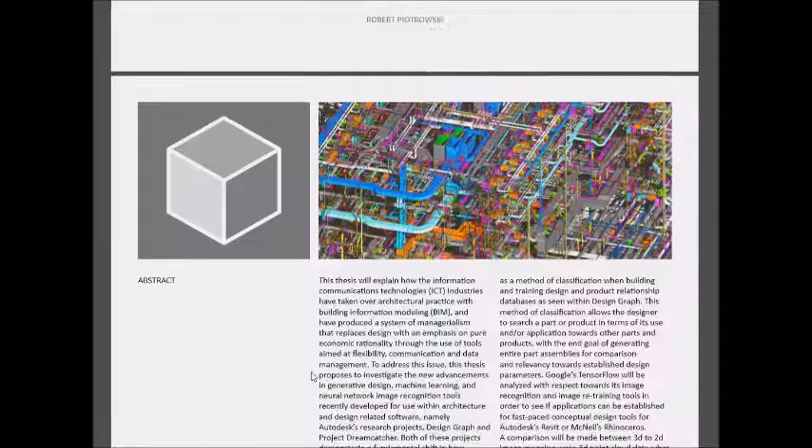So, this will be really hard to get under 15 minutes, but we'll try anyways.

This thesis will examine how information communications technologies, particularly in the ICT industries, have overtaken architectural practice and building information modeling. This has produced a system of managerialism, which replaces design and the traditional methods with an emphasis on pure economic rationality, used through tools aimed at increasing flexibility, communications, and data management.

To address this issue, I will be investigating generative design, machine learning, neural networks, and image recognition tools, and try to apply them within Autodesk's software packages that architects typically use in the industry.

Autodesk has released two experimental platforms, DesignGraph and Project Dreamcatcher, which are machine learning applications to design challenges dealing with 3D geometry. I think this is extremely interesting and maybe a different approach. So I'm going to examine two different ways to go about this.

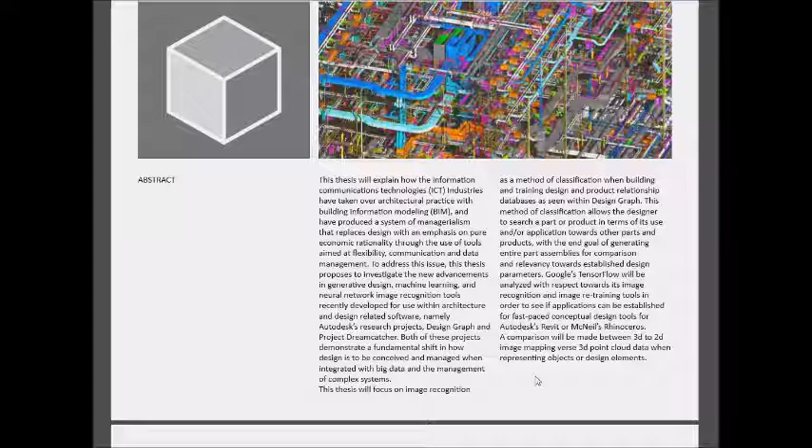Right now, architecture and engineering are undergoing rapid changes. The profession is completely changing in its recent adoption of these building information modeling platforms. Firms of all sizes are trying to get into this, as it's becoming the only way now to do business within the profession.

Clients increasingly call for it, and in some countries, in the European Union, it's even mandated for use on certain types of projects. So there's a very strong push towards this kind of platform on how buildings are to be done.

And this is a very different approach from what has previously been done in, say, a CAD-based platform, where you design and draw out your whole entire building. CAD could be, it's more open-ended. It could be called, say, a design platform.

But building information modeling is strictly classified as an information communications technology product rather than a design tool, as the main focus of it is coordination with other fields and industries. Its goal is to streamline processes of managing and comprehending all the data associated with an entire built environment project. This is done primarily through 3D digital representation of every component in that project.

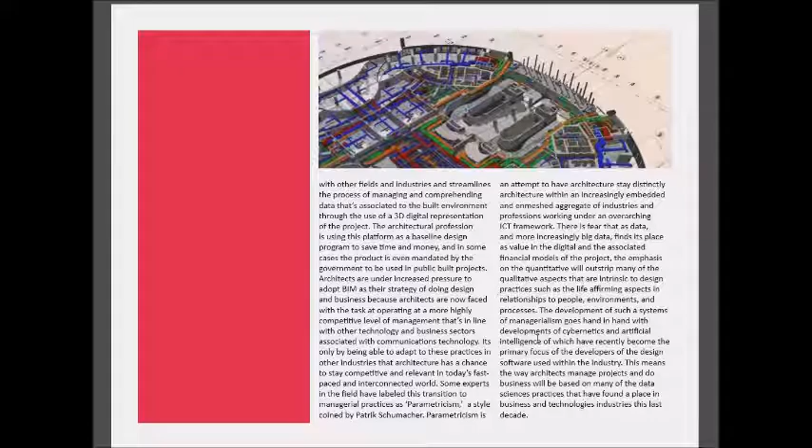Autodesk, which is the primary software company in the US that does industry standard software tools for architecture, movies, industrial design, and civil engineering, has a stranglehold on all these industries, but they're developing these tools. More often, they're focusing their efforts on machine learning applications in their research department, and they're slowly implementing these into their more commercial packages. One of these is Design Graph.

Design Graph is a different way of managing large complex data sets, and it uses machine learning to create a database of parts and relationships. This is more used towards engineering, mechanical engineering, industrial design, or applications that use a lot of standardized components that can easily be recognized.

They kind of came at this with: what if there was a better way to organize all information, so then it allows the designers to create more organically, for designs to emerge organically, so you don't get tied up in technical issues of representation and finding correct files and file types. So the core idea behind this was to use a Google search-like function for 3D models.

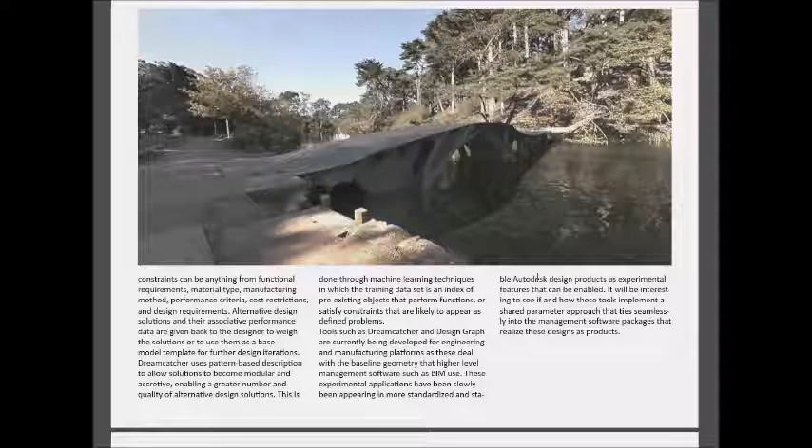This could be anything from material constraints to form, to load paths, to thickness—all these various things—and then you run the application and it will generate mesh-based templates that solve for these scenarios. What's good with a mesh base is that it allows for a template that can then be reverse engineered with other applications such as Inventor, SolidWorks, or CATIA. You can redesign to these conditions, and those platforms allow you to simulate if it's manufacturable or not with today's tools.

Okay, on to the project part.

Seeing that this is a hot topic in the fields I'm interested in and the applications I use in work and in school, I decided to try to build my own really basic application of this kind of stuff with image recognition and apply it to these 3D platforms that I'm using.

To do this, I chose Google's TensorFlow. It just came to mind in searches as a tool that would allow for this without extensive groundwork and research into all these things, as it provides kind of base templates for image recognition and image database for training or model retraining. So I picked TensorFlow.

It's Google's machine learning application, and it has unique features such as being able to provide visual representation through graphs and what's called the TensorBoard—turning your multidimensional data arrays into visual representations so you can more easily navigate and visualize how these processes are working.

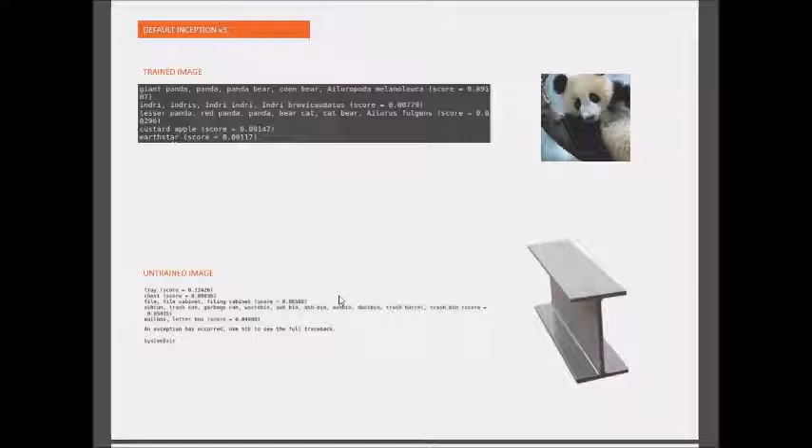In the case of buildings and built environment projects, you have hundreds of people, and in the case of complex projects, hundreds of different software tools being used. So it'd be extremely beneficial to share this information cross-platform, cross-industry, so everyone can be on the same page. Again, the goal of these BIM platforms is communication and flexibility, so you can identify risks or problems within these large complex projects.

So I chose a steel I-beam image and ran it through the default Inception model, and it came back with the best score as a tray, next best as a chest, then file cabinet, trash can, mailbox. I guess it was attempting to identify it as a metallic object of that particular size, but as you can see, a steel I-beam was not part of this data set, and therefore Inception had trouble categorizing it as such.

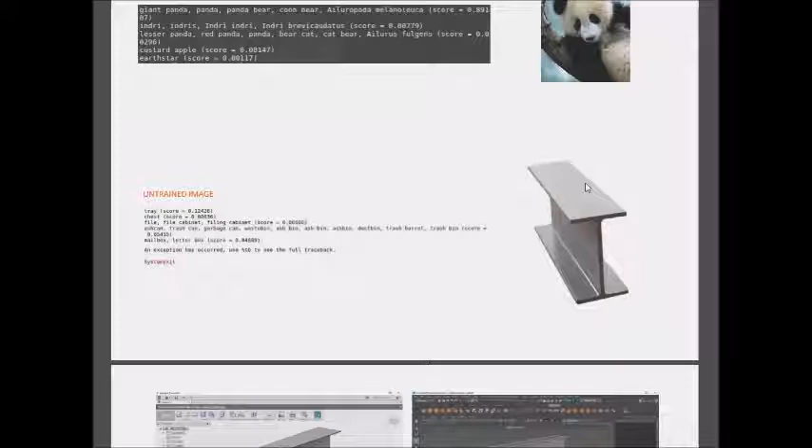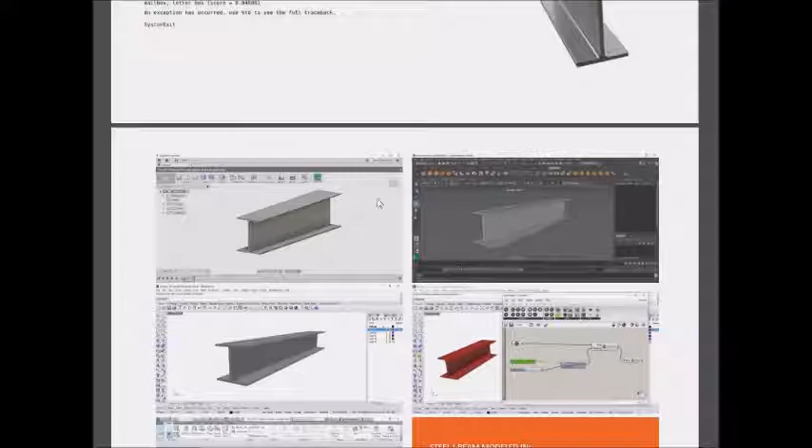Luckily, Inception has the ability to retrain based on a new data set you create, and only affect the top layer. So here I modeled various steel I-beams in different software platforms used in the industry - this is Fusion 360, Maya, Rhino, Grasshopper, and Revit. These would be my test images, much like the image above, to see if it can identify an object even if it's in different design platforms. It should, since it's based off of 2D images.

And that was kind of where this research is going. Is this more of a 2D image approach? Is this image recognition for cross platforms? Do you have to convert these objects into printed 2D screen captures of the thing, or is it done through the 3D point cloud data?

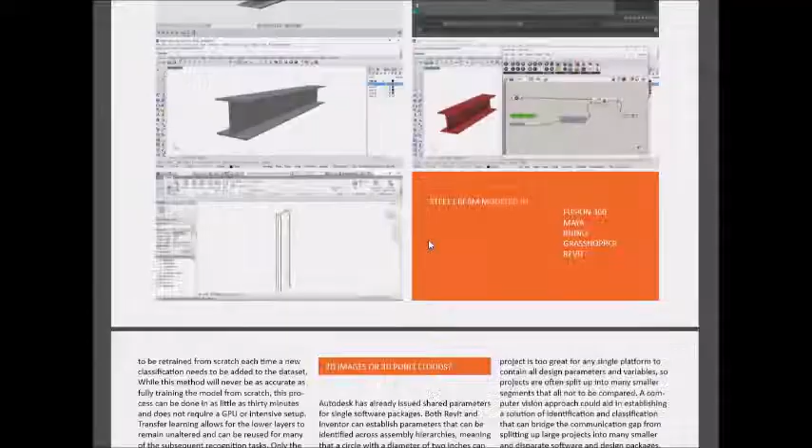In the case of what I could find, I guess, computer code-wise, the 2D image was the way to go, since that is a lot easier to find information on. But in the case of Autodesk's research, I believe it's the 3D route, identifying three-dimensional data of a specific file type. Where file types kind of fail is that, again, like the IFC files for BIM, they are platform dependent, and you're getting categorization, but it's only going to appear through a particular file type and data structure.

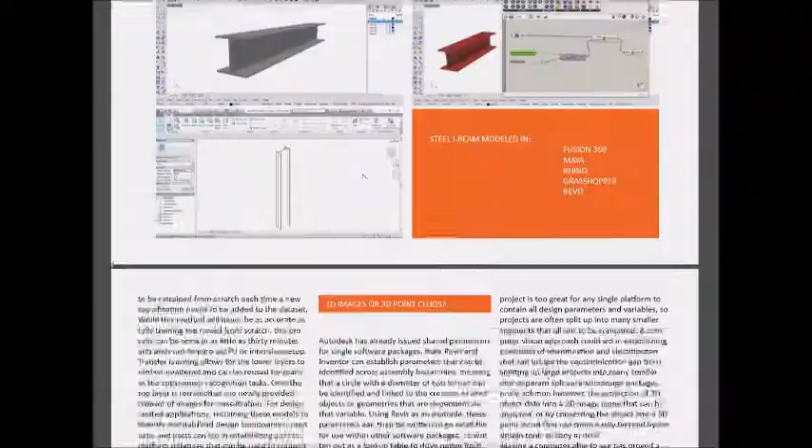Using 2D kind of breaks free from the constraints of one platform's file type. You can convert any software file to a 2D image - usually there's a print screen function, usually there's an isolate function where you can isolate your object and export it out, exporting out a 2D image even. So if that's the case, you can export these visual representations, and then Inception, if trained on a data set of that particular architecture element, could be able to identify it.

Problems with this kind of method are that architectural elements and assemblies are all incredibly complex and involve lots and lots of parts, and there are lots of different nuances. So having a general application like this might not work.

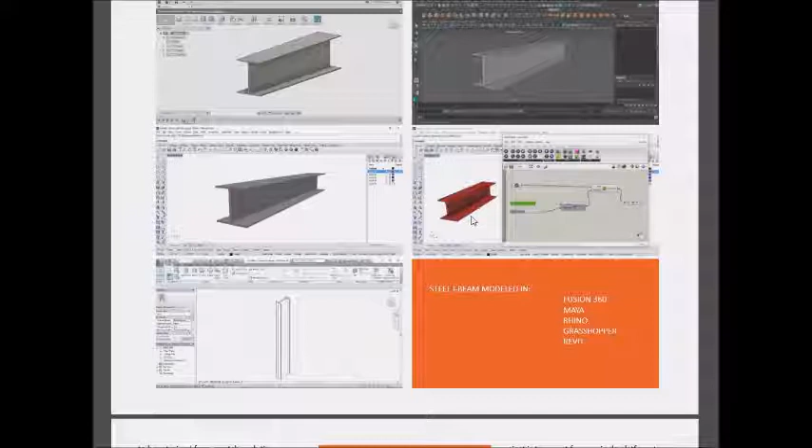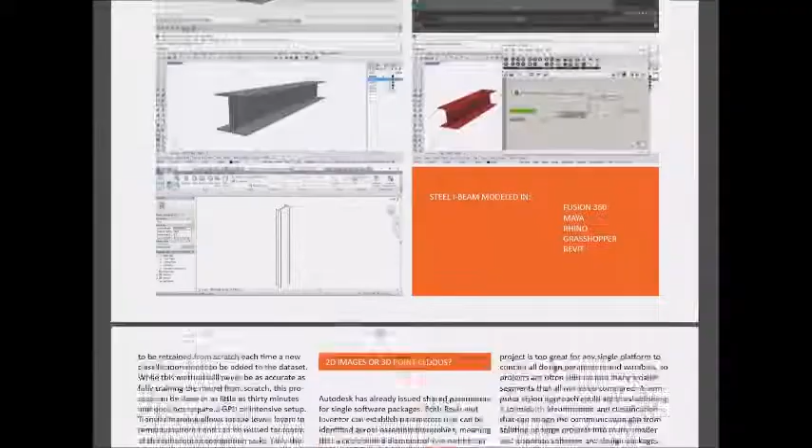And then, as I am well over 15 minutes, and everyone's eager for the results of this, I found out that using TensorFlow and Inception is also incredibly difficult, despite the documentation and GitHub and Stack Overflow comments and tools. It's just insane to go through all this stuff and figure out if everything's installed correctly. I think that was the biggest challenge - installing all the different dependencies of TensorFlow.

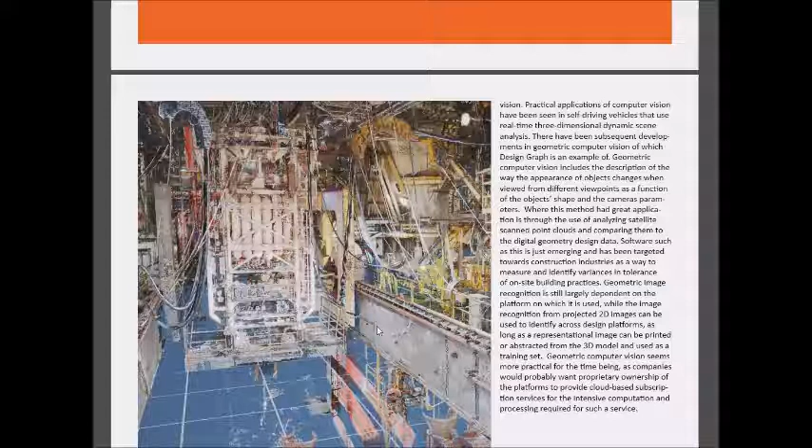Especially on the Linux platform, which I'm not too familiar with. A lot of these things had to be built from source or compiled from source, and since I'm very new to that, I have no idea if I did it right.

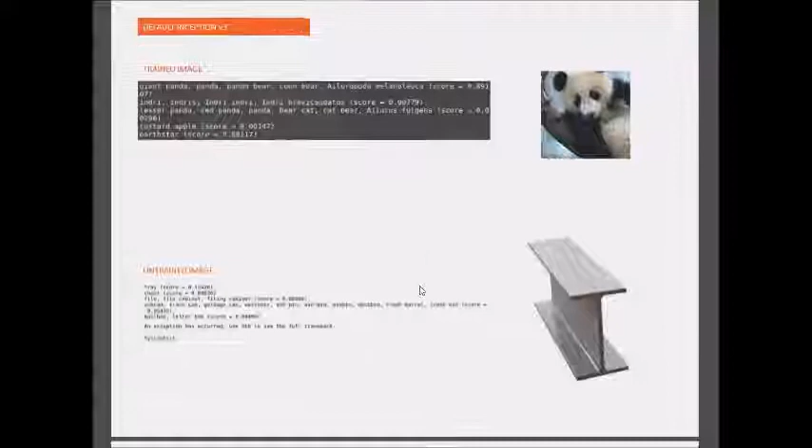So what I was able to do was train on, or identify on, this untrained data set, but the retraining application kept turning up errors, such as directory not found, and I don't think it was properly rebuilding the retraining file. So the computer would go on for like 2 hours and give me what looks like a stream of code, but it wasn't able to execute that or run any scripts using that compiled retrained model. So that's going to have to be further research.

I picked this as an easy solution, but again, it was a little complicated. But in theory, I think this method should work, at least in identifying very simple elements: columns, floor slabs, roofs, windows, doors - and you'd have a machine learning application that can be used cross-platform.